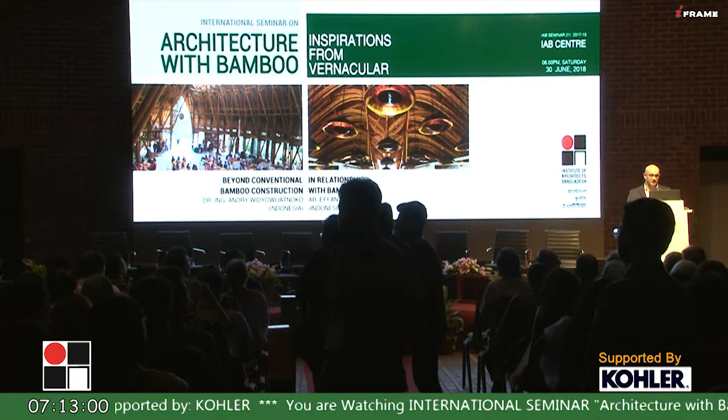Inspiration from vernacular architecture. For many regions, bamboo is a native plant and it is a sustainable material considering the energy consumption in its process of production. Bamboo can be treated as a sustainable, vernacular and aesthetical material in architecture. Hopefully today we will get wider information as well as inspiration from bamboo structure.

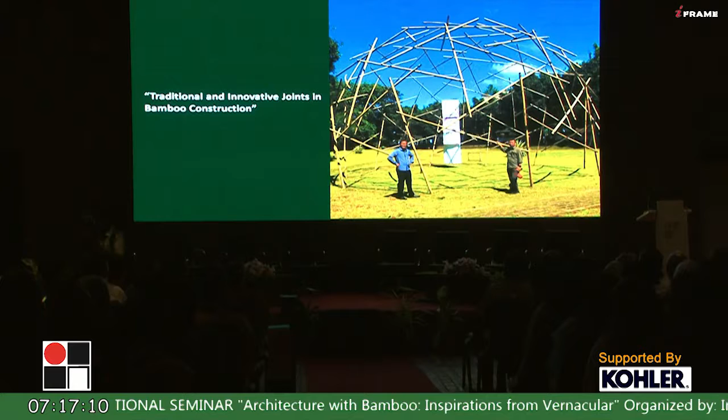Dr. Andry devoted himself to research on bamboo construction over the past several decades in Java and in general in Indonesia. Much traditional knowledge on how to build with bamboo has been lost while paving its way to modern architecture. After completing his graduation in 1995, he has been giving lectures and conducting workshops on bamboo construction in various countries like Malaysia, Philippines, Myanmar, Colombia, and Australia, besides teaching at ITB.

He has more than 25 publications and research works on bamboo and its different characteristics and construction techniques. As a pragmatic architect, he has completed more than 40 projects, including Great Hall OBI, a Bamboo Preservation Facility, and the Ecocenter of Koh Chang, Thailand. He even holds two patents on bamboo joints with radial compression for tensile, space truss, and knockdown structures, and a customized radial compression joint with multi-knots for high tensile strength connections.

Dr. Andry has won several awards. He was the award winner for Great Hall OBI as the Best Indonesian Building Construction in the Architecture category in 2011. Tempo magazine nominated him as the Bamboo Architect of the Year 2014. Today we are very happy he is with us to give a presentation on Beyond Conventional Bamboo Construction. Ladies and gentlemen, let's put our hands together welcoming Dr. Andry on stage. Enjoy the presentation.

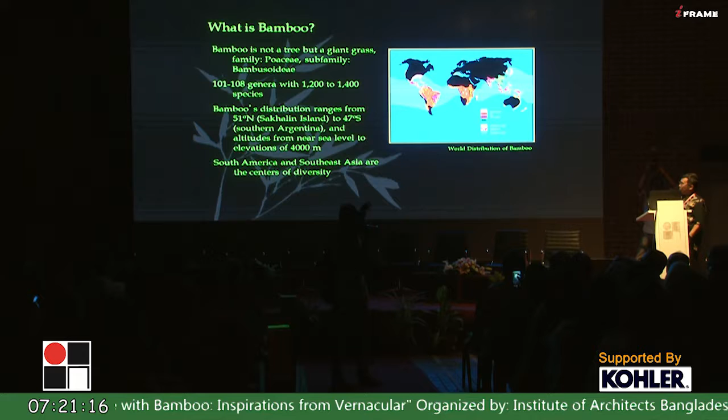Bamboo is actually not a tree. Bamboo is a giant grass, belonging to the family Poaceae or subfamily Bambusoideae. In the world, there are more than 1,000 species, and the distribution ranges almost all over the world. Most of the diversity of the species is in Southeast Asia and also in South America.

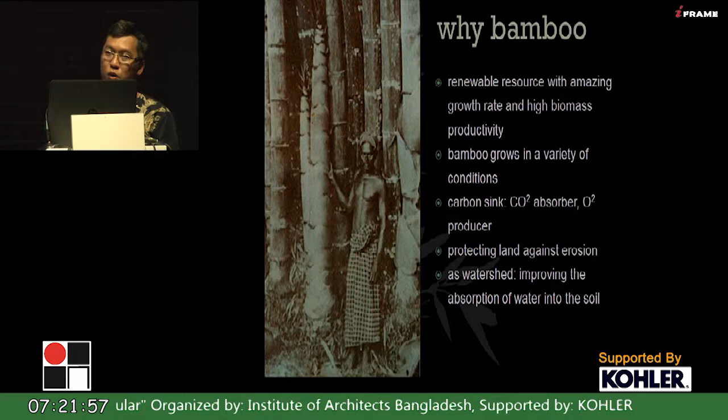I always tell the students why we have to work with bamboo, because when we use bamboo there are so many advantages. For example, bamboo is a very renewable resource with an amazing growth rate. It belongs to the fifth fastest growing species on Earth, and also produces very high productivity. Bamboo also grows in a variety of conditions.

The good thing about bamboo is it becomes a carbon sink and protects against erosion. It's also very good for watersheds because it improves the absorption of water into the soil.

When we talk about bamboo construction, you can see here there are so many varieties of bamboo construction. As you can see here, all of this I consider as bamboo construction.

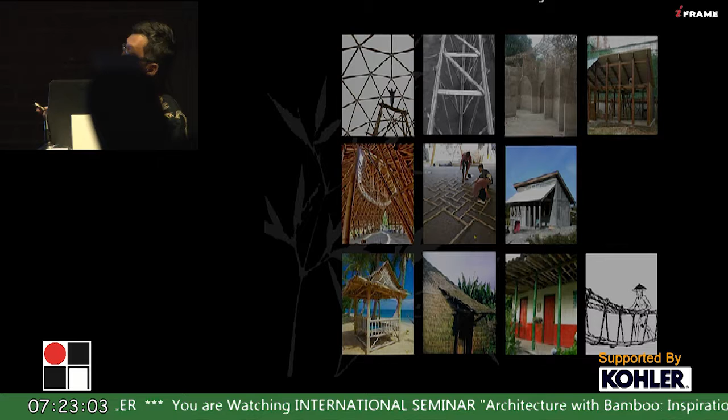But instead, if you take a look, it looks like concrete construction. It looks like timber construction, but actually this also belongs to bamboo construction.

That's why I made a kind of classification in bamboo construction, and the best way to classify it is by the form of the poles that is used. For example, this belongs to bamboo poles construction, and this belongs to split bamboo construction.

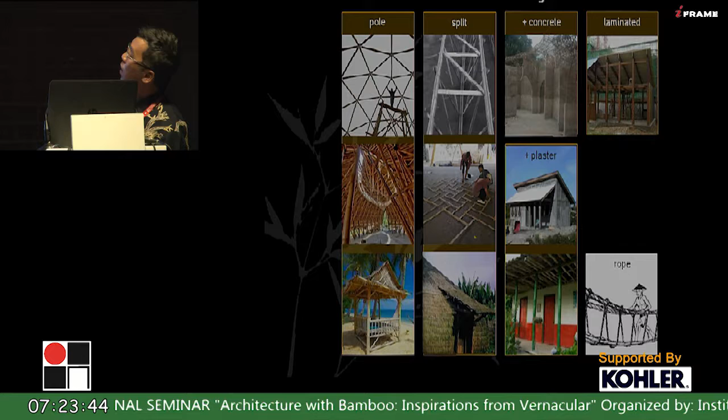But further than that, in the upper part, as you can see here, bamboo is used to replace other materials. The best example is this one: laminated bamboo, which can replace 100% of timber construction.

That's why in my classification I classified the upper part as substitutive bamboo construction, where the idea is to substitute other materials with bamboo, which is more sustainable.

Other than this substitutive bamboo construction, I would call it conventional bamboo construction. I divided this conventional category into traditional bamboo construction in the bottom part and engineered bamboo construction in the middle part.

And this is the construction that I have already done, belonging to the group of substitutive and also conventional bamboo construction that I've already researched up to now.

First, I would like to give some overview about the possibility of using bamboo as a replacement for brick construction. This is a development of plastered bamboo construction.

Why did I do this? This was in the early days when I went into bamboo construction, because almost no one in Indonesia wants to live in a bamboo house anymore. That's why I tried to provide the common image of a permanent house instead of masonry construction.

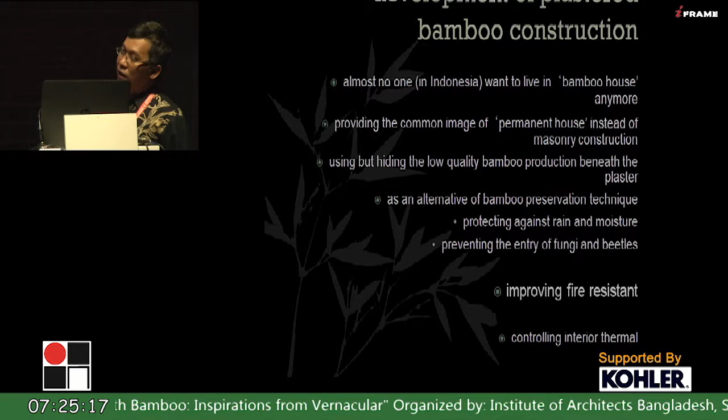The main idea was also to improve fire resistance. By doing this, I already made a fire test

to the system. The idea is to make a woven bamboo here, and then we have a half bamboo acting as a column here and also as a beam. Everything will be plastered on the outside.

So it looks like brick construction. I've made many prototypes of this building. We can build this one in the workshop and then bring it to the location we want.

We can build this bamboo structure in only one day. After that, we can plaster it so it looks like brick construction, but it's made out of bamboo

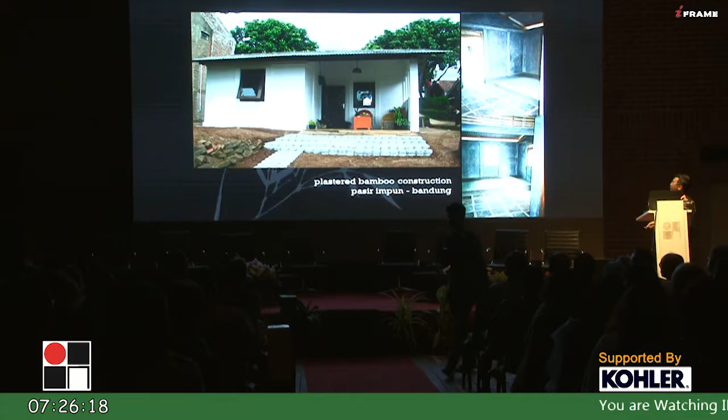on the inside. I also made other possibilities using different types of woven bamboo, like this one and this one. And these are other examples of this structure.

This is the research that I've done recently, testing the bamboo plastered wall, and it can pass 2 hours of fire test using the plastered bamboo construction.

I think this is also one of the options to provide the common image of brick construction, but using low quality bamboo. If we go back to the classification, I would like to discuss

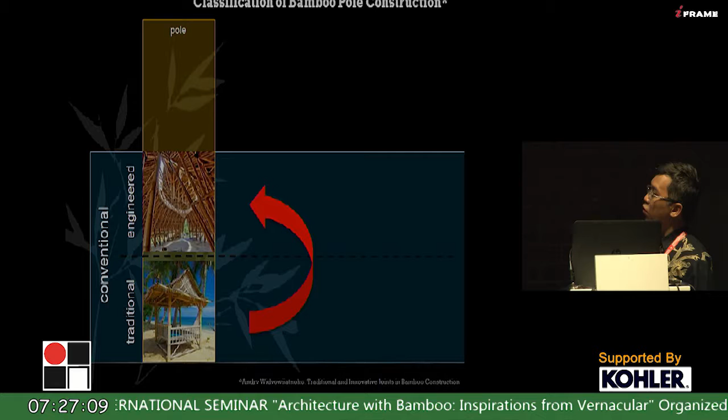the development from traditional bamboo construction into engineered bamboo construction, as you can see here. Basically, going from traditional to what I would call engineered bamboo construction means getting bigger and wider spans—making it bigger, making it wider span, even making it higher. This is the main idea of the development from traditional into engineered bamboo construction.

How to do this is by strengthening the structural element.

In traditional bamboo construction like this one, we use only one post here, and then only small pieces of a post here. It's strengthened using, for example, in here, 12 or 9 poles of bamboo column.

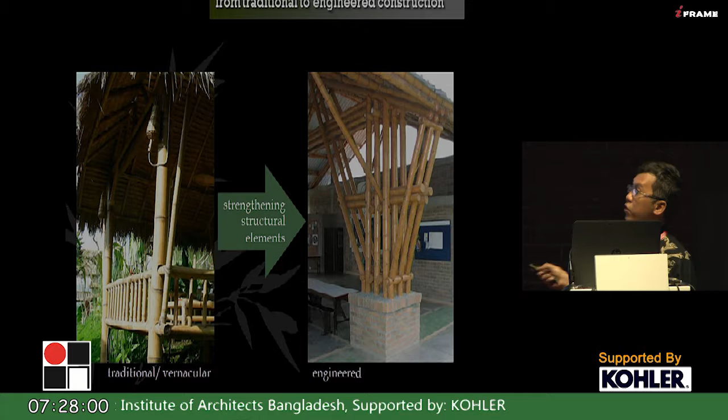If we consider adding this one, it's 15 bamboo columns, just strengthening the structural elements. How to do this? Actually, there are only small steps.

In traditional bamboo construction, mostly we use a connection like this, using a dowel here, which prevents sliding, and to prevent popping up we use a rope connection. But this connection is limited to only 2 layers like this. It's impossible to connect more than that.

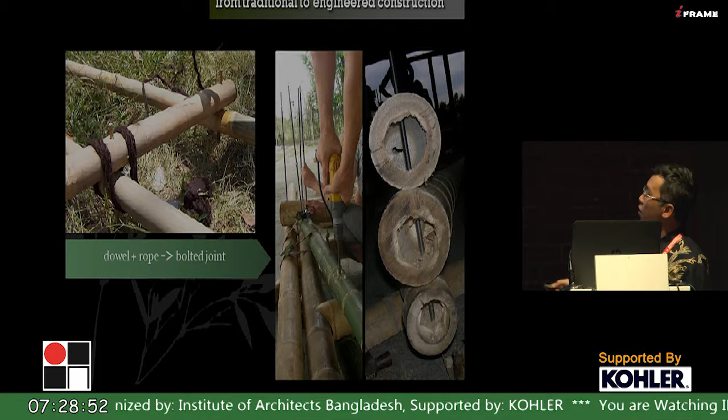It's not effective, so the development moved from dowel and rope into a bolted joint using a long threaded rod like this, utilizing an electrical drill. With this we can connect even 3 bamboos or more, much easier and much stronger than before.

This is one of the results, when I designed this Great Hall of Outward Bound Indonesia in Jatiluhur, only 2 hours from the capital city of Indonesia. This is the design of the structure, with dimensions approximately 31 meters by 20 meters, without any column in the middle. I used more than 8,000 bamboos for this structure.

This is the upper part. I used a hypar structure at the entrance, and on top of the stage there. And this is the floating roof that I designed.

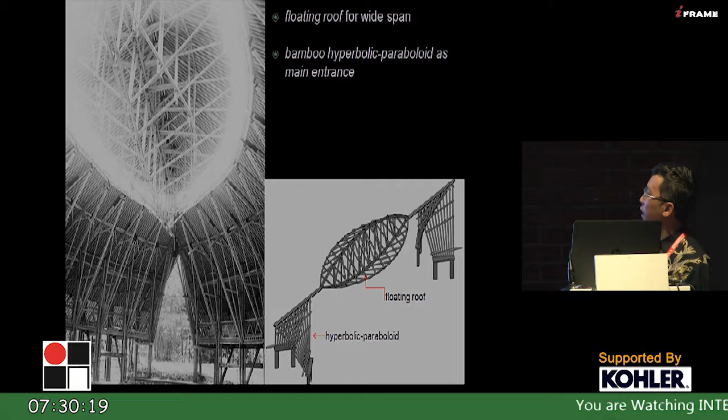I introduced the use of bamboo as a tension element in this part. I also introduced the use of a hyperbolic paraboloid to create the entrance at both ends. And this is the floating roof.

The span of 20 meters was made by having 5 meters of cantilevers and 10 meters of floating roof in the middle. I used only 30 two-dimensional frames like this, then arranged them radially to become more 3D spaces.

And this is the main entrance. As you can see here, this is the condition of the building during a bamboo symposium. This is another program in this building.

The good thing about the structure is the pattern of the skylight above. It's really beautiful in the bottom part.

The other project I want to present is just recent, not yet finished, but almost complete, which is Teras Sunda Cibiru. It's like a cultural building in Bandung. I made a lot of facilities, but I want to present only the hall, the big hall.

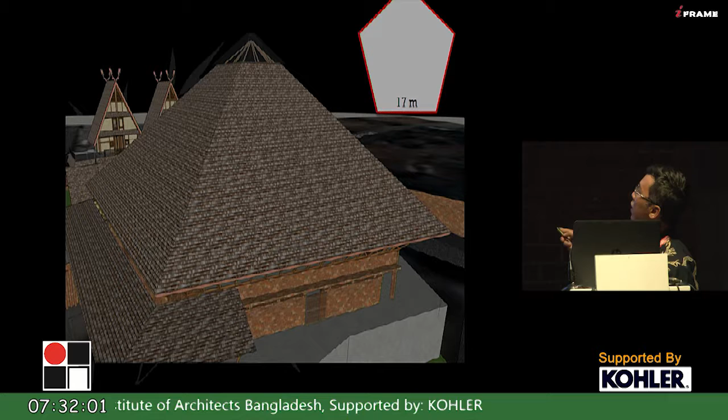Actually, the big hall is like a pentagon, with a span of 17 meters from here to here, and without any column in the middle. I solved this wide span structure problem by using a twisting structure.

I solved it with twisting and then stacking until the top. This is the design that I made, like this. And this is the interior part of the structure. And this is the result.

It's not finished yet, it's under construction. Actually, it already stands on its own, but the scaffolding hasn't been removed yet. Some parts are already removed, as you can see here. This is the main structure of the roof.

And this is the structure. I used a steel pipe in the bottom part because I needed something really reliable to transfer all the force into the column below.

If we go back to the classification, now I'd like to discuss the development from engineered bamboo construction into substitutive bamboo construction. Conventional bamboo construction is based on the characteristics of the bamboo. But in substitutive bamboo construction, it basically just tries to copy other construction, other structures, replacing the material with bamboo. That's why the characteristic of the structure in substitutive bamboo construction is quite similar to the characteristic of

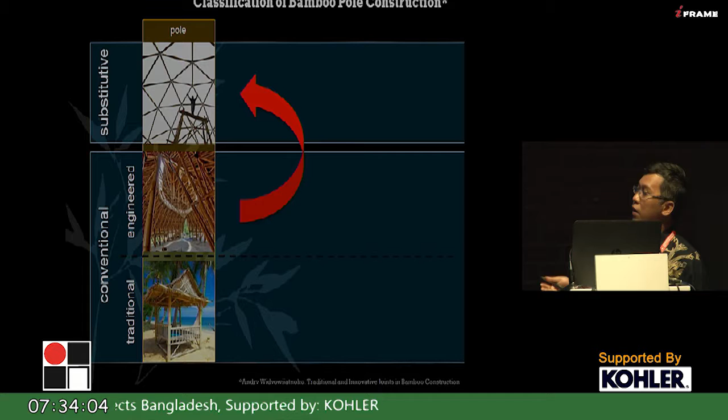the one that is replaced by bamboo. The main idea of substitutive bamboo construction using bamboo poles is to replace established space structures that are already made mostly from metal, like this, or sometimes also from timber.

Then the idea came up - this is from the book The Gift of the Gods by Oscar Hidalgo - and the idea came up of how to replace this material with bamboo, like this one.

Some of this experience has already been done, and this is some of the examples. The characteristic of the structure is mostly three-dimensional frame, whereas in conventional or traditional bamboo construction it's mostly only two-dimensional frame.

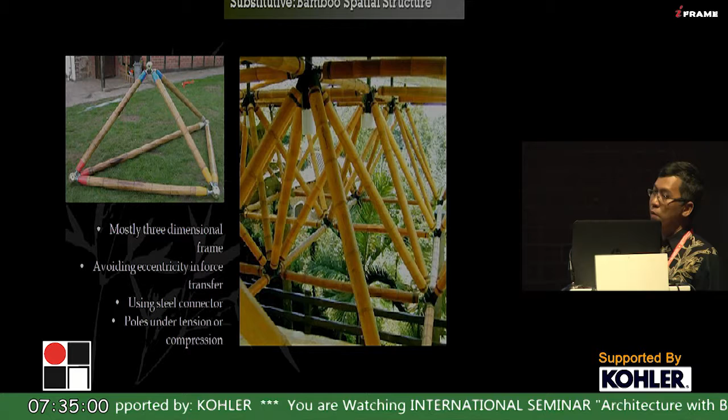It also avoids eccentricity in force transfer, whereas in conventional bamboo construction there are often many eccentricities in force transfer due to the difficulty of connecting all the bamboo together at one point. It also uses steel connections and introduces bamboo poles under tension, whereas in conventional construction it's mostly under bending or under compression.

The challenge came because we want to have a bamboo connection which avoids eccentricity in force transfer, because this is the main idea.

The other aim of the research is making the bamboo purely under tension or compression. It took a lot of effort to try to find the best and most effective bamboo connection.

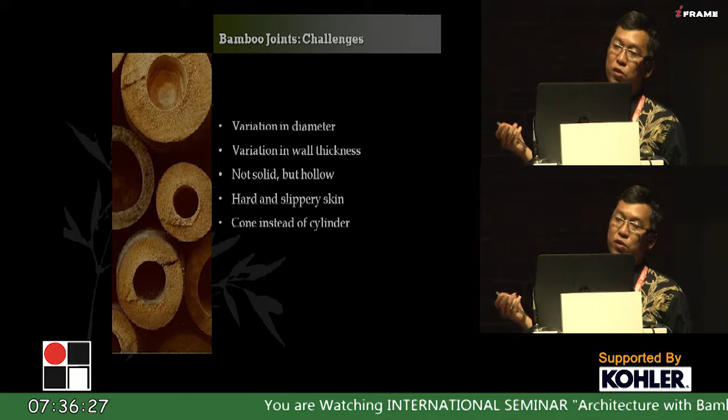There are so many challenges in doing that. I want to mention only 5 of them. Bamboo has variation in diameter, not only because one species of bamboo has a different diameter from other species, but also variation between the bottom part and the upper part, for example.

There's also variation in wall thickness. As you can see here, some bamboo have very thick walls, some very thin walls. Bamboo is also not solid but hollow, and it has a very hard and slippery skin. Bamboo is also considered as a cone instead of a cylinder.

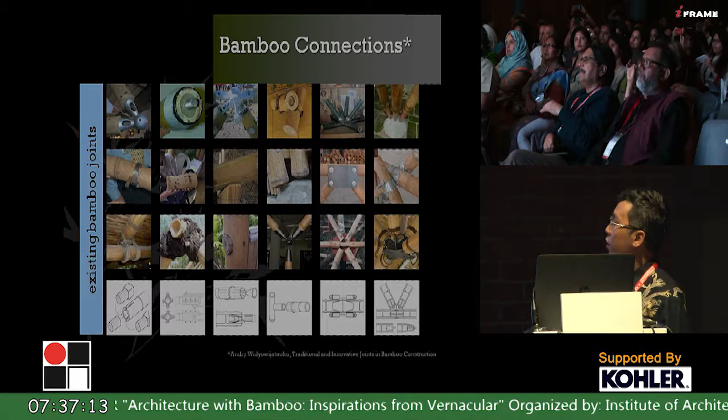In the existing world of bamboo construction, there has been so much research and experimental construction trying to make bamboo joints. Some are already applied in construction, some only at laboratory scale, and some only as ideas in drawings. Although there are so many bamboo joints existing in the world now...

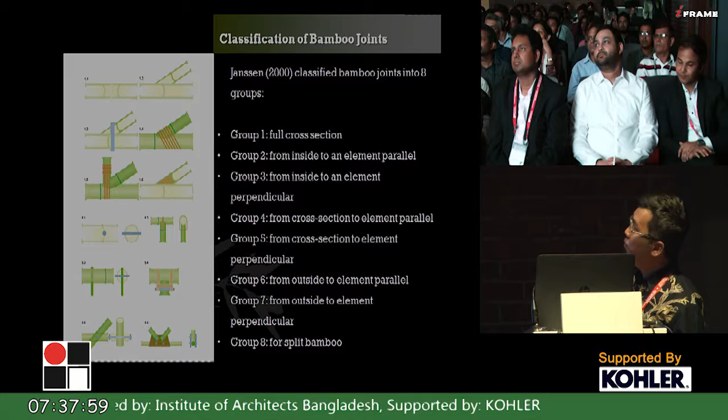before 2012, there was only one classification, by Professor Jules Janssen in 2000. Professor Jules Janssen is a professor from Technische Universiteit Eindhoven in the Netherlands, and he classified bamboo joints into 8 groups.

The problem with this classification is that group 8, for split bamboo, is not relevant to bamboo pole construction. Also, according to the author, groups 3 and 7 have hardly any practical application. Though they are theoretically important, they are almost impossible to make in the real world.

That's why I tried to make a new classification of bamboo joints in 2012. My classification is based on the following criteria: the way of force transfer and the position of the connector, whether it is attached on the inside or outside of the pole, and whether it is attached parallel or perpendicular to the fiber. A type of joint is considered as a connection between one bamboo and its connector or supporting base. This is different from the classification made by Professor Janssen.

Professor Janssen, for example, made this picture as one type of classification, one group. But in my classification, I divided it into 2 groups: this is group 5 and this is group 1. Here is the classification of bamboo joints.

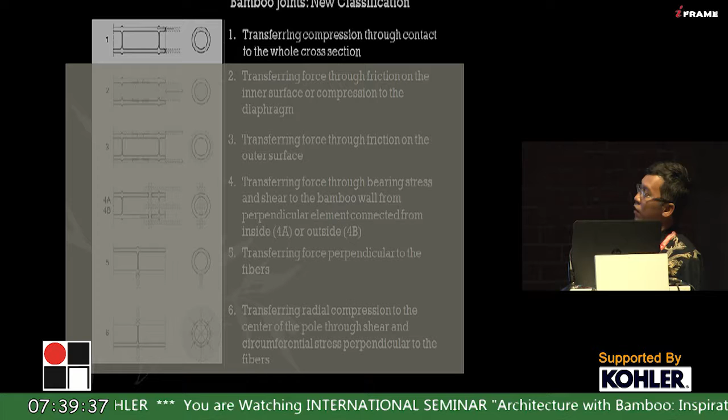Group 1 transfers compression through contact to the whole cross-section—only contact to the whole cross-section is taken into consideration. The second group transfers force through friction in the inner part of the bamboo, or compression to the diaphragm, since bamboo has a diaphragm inside. Group 3 transfers force through friction on the outer part.

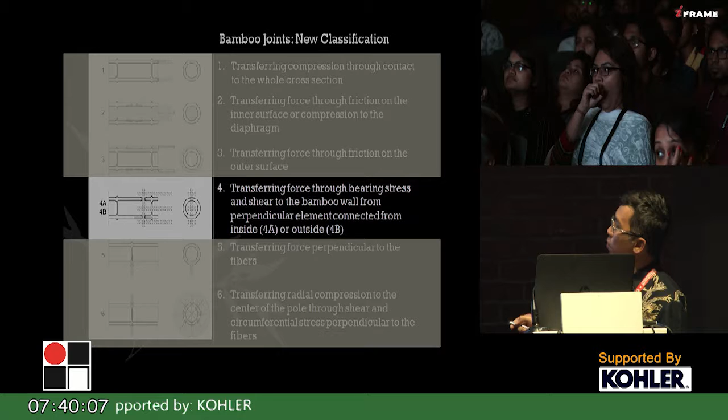Group 4 transfers force through bearing stress and shear stress to the bamboo wall, perpendicular to the fiber, connected from inside or from outside. Group 5 transfers force perpendicular to the fiber, and group 6 transfers radial compression to the center of the pole through shear and circumferential stress perpendicular to the fibers.

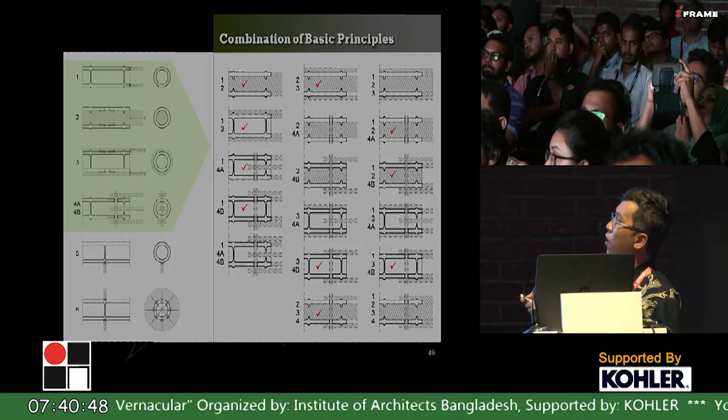I added this joint because most of my research basically uses these kinds of principles, which I will present later. Most bamboo joints use a combination of principles, like combining group 1 and 2, or groups 2, 3, and 4. With a tick mark, I indicate that I can already find it in reality; this one has not yet been found in reality.

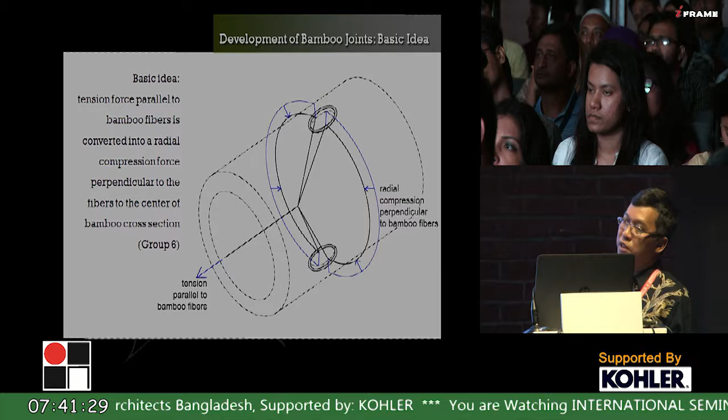Now I would like to go into the development of bamboo joint, which I already made in 2012. The main idea is very simple: the tension induced parallel to the fiber is converted into radial compression on the outer part. So the stronger the tension, the stronger the radial compression will squeeze the bamboo and generate more friction on the outside. It's considered a very effective bamboo joint, and I made many research and calculations on this type of joint.

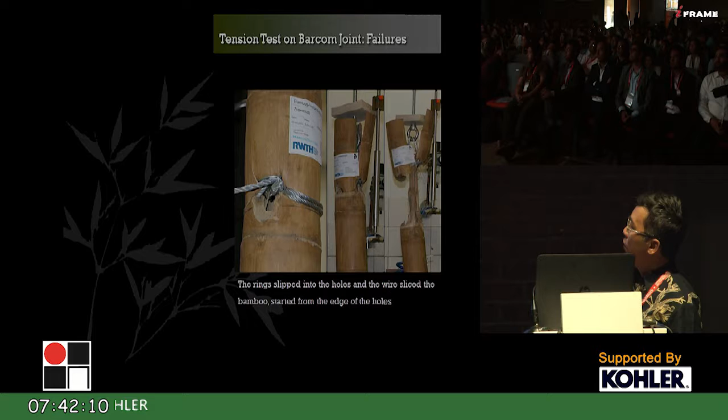I made 3 samples of this using the Guadua angustifolia from Colombia. This is the detail of the joint, approximate detail of the joint, and this is the failure mode. The steel wire tears down the bamboo and then goes up like this. But the strength is very high.

The average ultimate load capacity is 3.5 tons. It's already very good. However, I tried to improve the strength of the joint. That's why I went to the next bamboo joint.

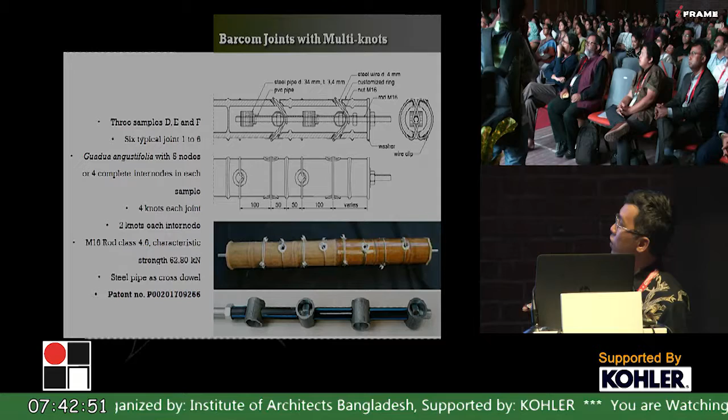Barcom joint is the bamboo radial compression joint with multi-knots. Instead of only using one knot here, I multiply it into 4 times, with the detail shown here. For this one, I use a 16 millimeter threaded rod with characteristic strength of more than 6 tons. And this is the test that I've made.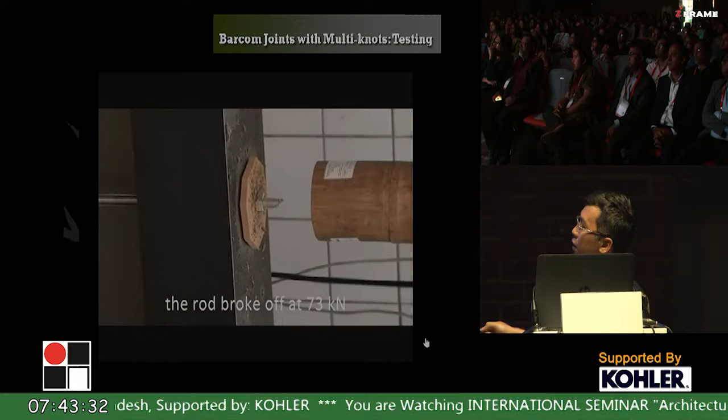6 tons, 7 tons, 7.3 tons, and its failure is here, in the 16 millimeter threaded rod. 28, 50, 60, 6 tons, 70, 75.

The failure is the same in all of them, in the threaded rod like this one, with only small scratches on the bamboo. This means the capacity of the connection can be much higher if we change the properties of this threaded rod. So it's a very effective joint, and as you can see, the average load capacity is up to 7 tons.

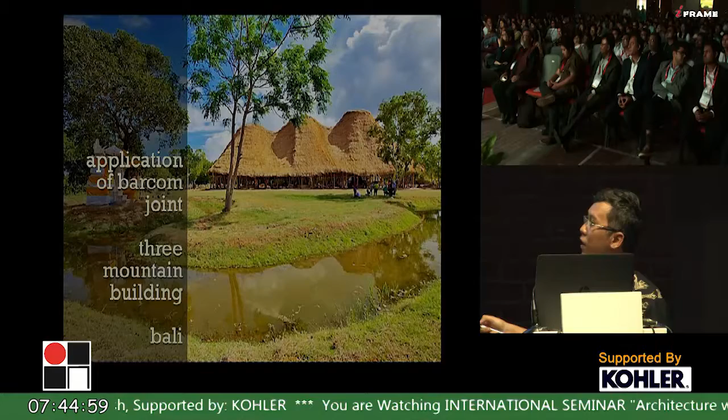The application of this structure is already implemented in the 3 Mountain building in Bali. This is the 3 Mountain building. Previously, it was not used because of a lot of deformation when the wind blows.

This is the structure. Basically, there are 3 big columns and also a perimeter column. The very long rafter lies from here to here, and because it's very long, it does not work in bending but works in tension in this part. So it's up to 15 meters long, these rafters.

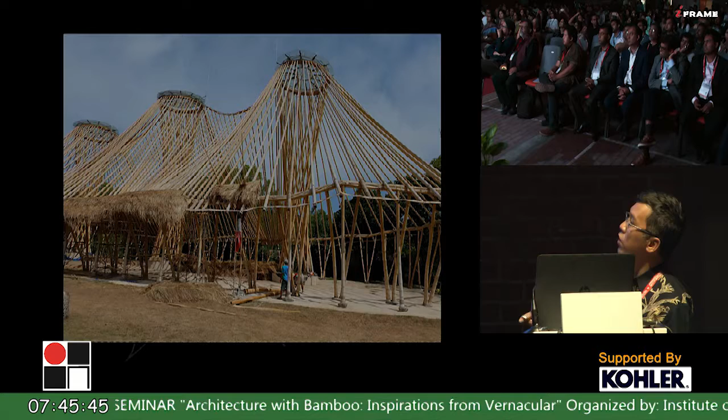This is the detail of the joint using the Barcom joint here, and this is the joint that I've designed, connecting all of this on top of the structure, as you can see here. This is the bamboo radial compression joint, and this is the very beautiful structure.

It was designed previously in Green School, and now it moves to Pulau Serangan. I think it was designed by Jörg Stamm, one of the bamboo experts in the world. This is the construction.

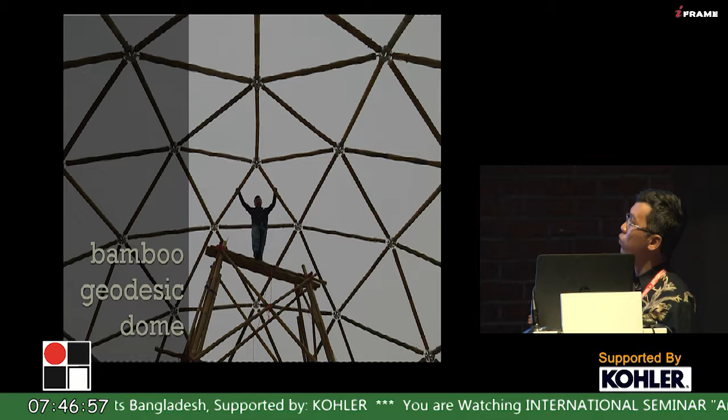Another project that I want to show you is the bamboo geodesic dome. Basically, we tried to copy another dome and just replace it with bamboo. I've built this one in only 2 days. The preparation took almost 2 weeks to make all of this connection, and then we erected and assembled this in only 2 days in Damyang, Korea.

It was used to sell souvenirs during the World Bamboo Congress in 2015.

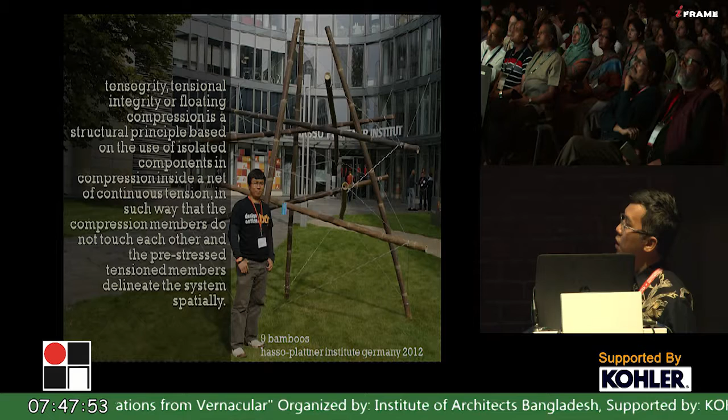Another project that I want to show you is the bamboo tensegrity. I would like to introduce bamboo for use in some other structure, beyond conventionality. That's why during my dissertation I also built this tensegrity structure. What is tensegrity? Tensegrity, or tensional integrity, or floating compression, is a structural principle based on the use of isolated components in compression, always made with bamboo, inside a net of continuous tension.

This continuous tension is made of steel wire in such a way that the compression members do not touch each other, and the pre-stressed tension members delineate the system spatially. So it's like a floating bamboo here. I built this one in 4 hours. My previous structure was built in 1 semester with students. Now I built this only in 4 hours with only 3 volunteers.

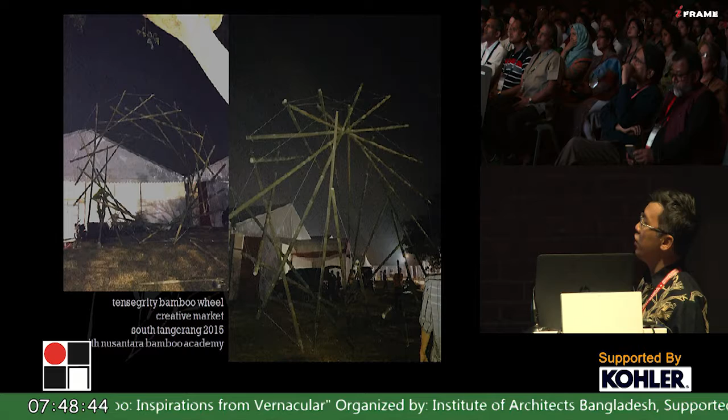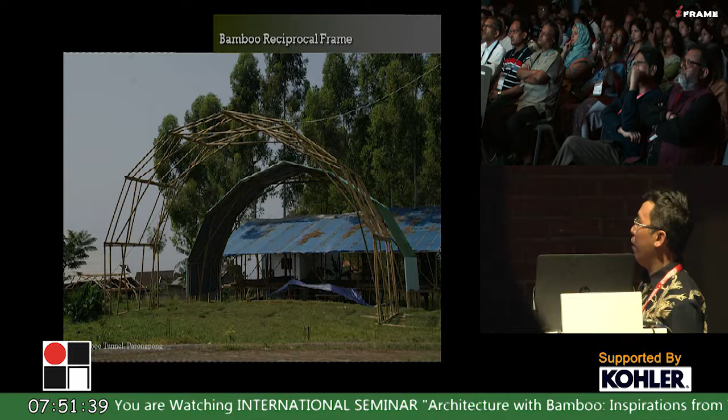After a lot of experience conducting tensegrity workshops and research in tensegrity and reciprocal frame, I then invented a new system of structure, which is the combination between these two.

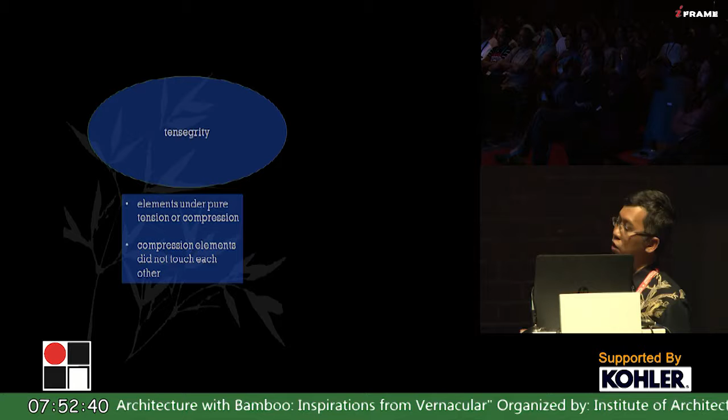First, I would like to give you the main characteristic of tensegrity: the element is under pure tension or compression. If I make it with bamboo, the bamboo has the compression, and the steel wire will have the tension force. The main idea of tensegrity is that the compression elements do not touch each other. This is the characteristic of tensegrity.

On the other hand, in the reciprocal frame, in the conventional way, the element is under bending stress - not compression, not tension, but bending stress. One element lays on top of another element reciprocally. So with small pieces of timber, we can have much more span.

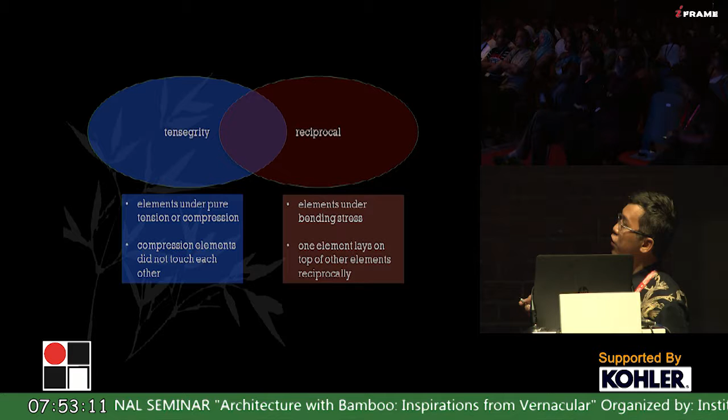Then I combine these two to have the rection - I call it rection, or reciprocal tension. It is different between these two, because the element that I use is under tension or bending stress. This is different from tensegrity, which is under tension or compression, and different from reciprocal frame, which is under bending stress. Rection is under tension or bending stress.

The steel wire will have the tension, the bamboo that I use will have the bending stress. But the bending elements did not touch each other like in tensegrity. This is different from the conventional reciprocal frame, where one element lays on top of another element reciprocally.

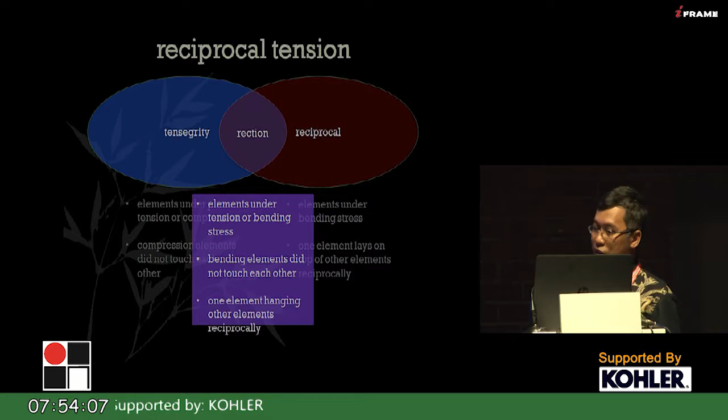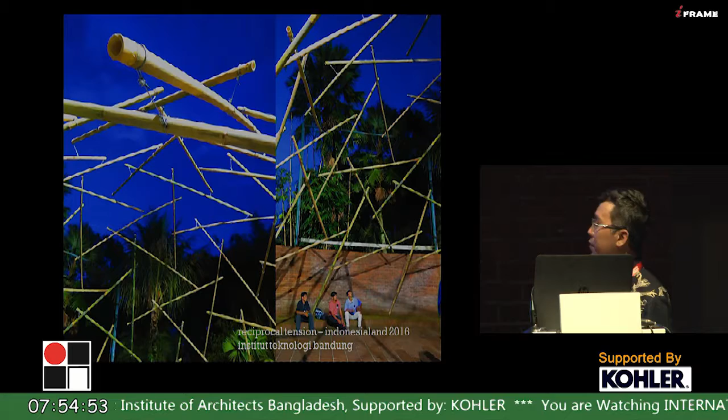This is the latest workshop on advanced bamboo tensegrity structure in 2017 that I want to present. I would like to show you, as the last part of this presentation...

This is actually a collaboration workshop between Erfurt University in Germany, Kyushu University from Japan, and Institut Teknologi Bandung, my university in Indonesia.

The workshop was called Advanced Tensegrity Structure. The participants were separated into groups, and in 2 days, starting from knowing nothing about tensegrity, they had to design a tensegrity sculpture with an amorphous shape.

Then on the third day, for 3 days, we built the real tensegrity sculpture, and we also built the rection dome, which is the biggest one that I've ever built.

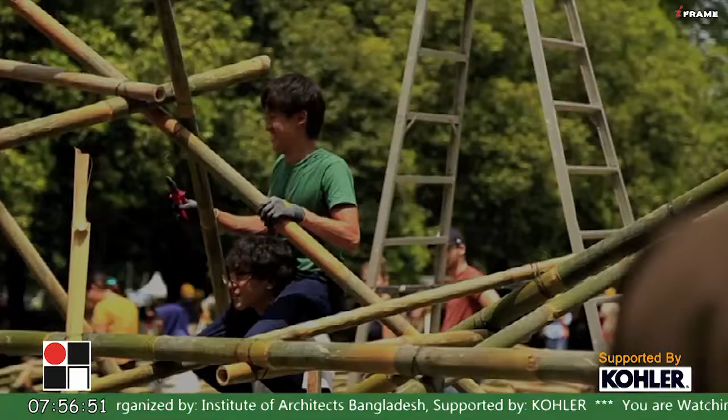This is the construction of the amorphous tensegrity, and this is the construction of the reciprocal tension, or rection dome.

This is the amorphous tensegrity.

I will show you this - this is the reciprocal tension, and how it is very stable, although I shake this one. It's very stable; I shake it, but it's very, very still, very, very stable.

I did this just before I had to remove this structure, to show that it's really, really stable, although it looks like it's shaking.

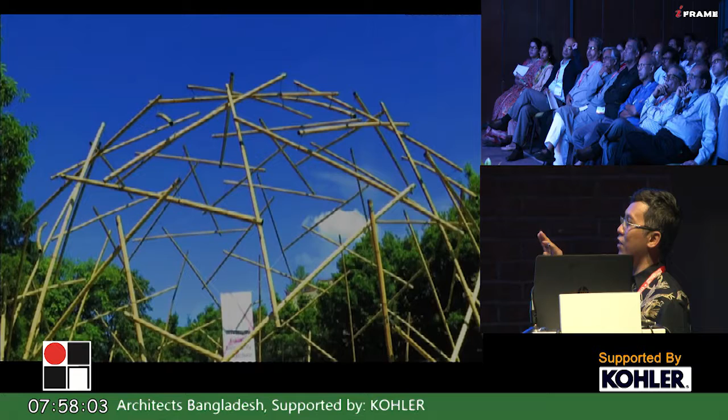I think that's all for my presentation. Thank you very much.

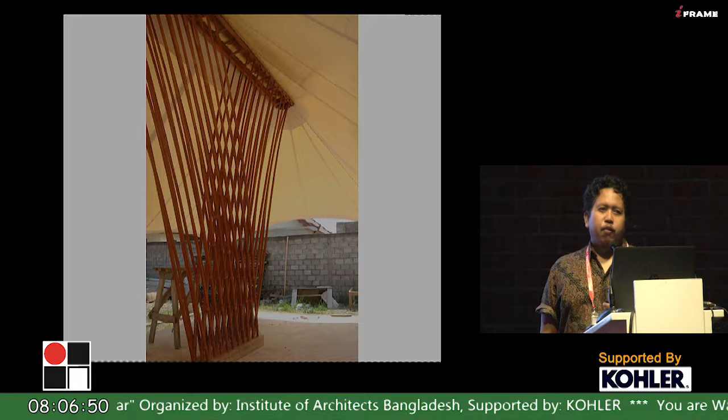And this is from 2007. Now it's about 11 years, right? And it still exists. So it's kind of strong too and durable, actually. When you protect the bamboo from the elements, from the rain, from the sun, it's strong enough and it's long lasting - at least more than 10 years now.

So with this project, I got the idea, okay, I fell in love with this material. This gave me an answer, because I wanted to design something playful, but in the meantime that's really expensive using steel, using laminated wood. But God gave me this material - it's everywhere in Indonesia, and I hope there's also in Bangladesh. If you put the energy, put the creativity in there, it becomes something that works and is also affordable. So this is my first case that made me fall in love with bamboo.

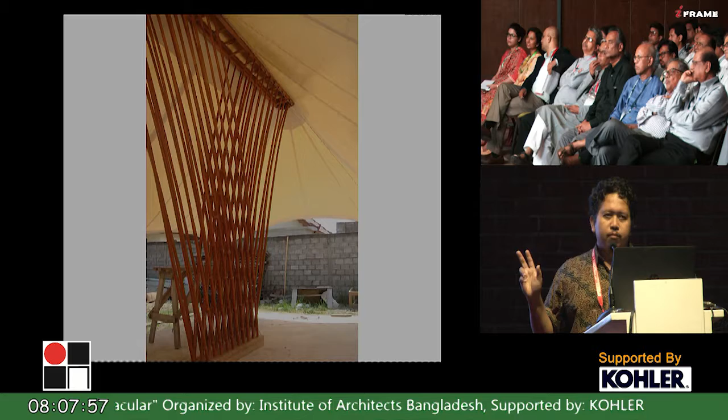So by doing that, I resigned from that company, and then I started learning about bamboo. And these are a few characteristics of bamboo that I found based on my experience.

Bamboo is long. Actually, if you go to the forest, bamboo is at least 14 meters long. But if you see bamboo in the street, it's 3-4 meters, because of the truck that brings it here - it's really difficult to bring 14 meters. And anyway, people don't need that much.

But actually, it's long, and bamboo is curved, so it's not a cylinder. As Andrew said, it's conical, but it's also curved. When you draw bamboo, you cannot draw it straight - bamboo is always curved. That's the natural characteristic of bamboo. I need to treat it as a curved material, not as a straight cylindrical pipe material. And it's hollow, which makes it lightweight, and it's flexible, smooth, elastic, and has a lot of other technical properties that Andre already covered in his presentation, which is good.

And we, F Studio - I established my own studio - are committed to creating characteristic designs using bamboo, but it should be something that can only be built with bamboo. I mean, not trying to replace other materials' style, but designs that can only be built with bamboo, or at least effectively built with bamboo. Maybe it can be built with steel or other materials, but then this design is only effective, cost-wise and in the way it works, with bamboo. So that's how my studio really wants to go about designing with bamboo.

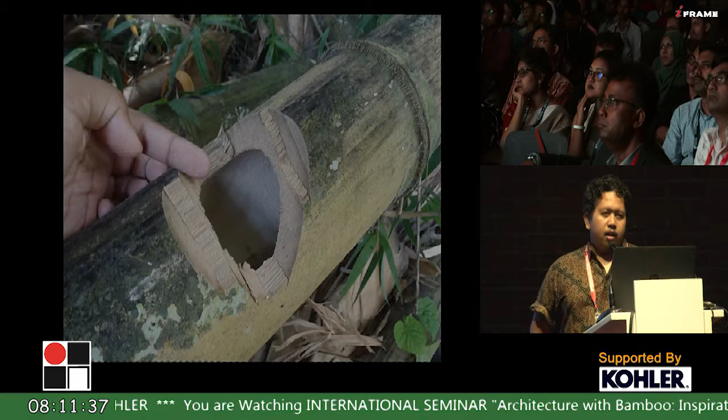Again, we try to use local materials, so we go around checking the bamboo, because they never used it before. I found their bamboo - it's not as big as what we have in Bali, but the thickness is really good, that's my hand showing the thickness. Because they never use it, this is really old bamboo, really strong, comparable with the strength of wood.

So it's really good. And the good thing with this client is, just do whatever you want, Evan, as long as our activity is accommodated. That's really a dream client, right?

Because in that area, they never used bamboo as a building material before, they just use a really basic shack or basic hut. We try to show them what kind of bamboo structures can be done.

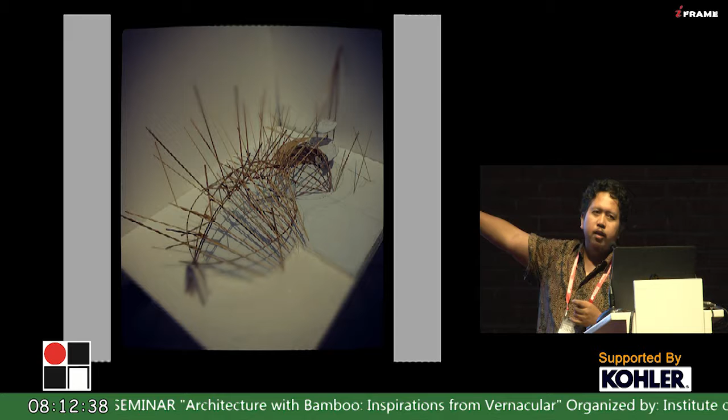This is the preliminary model. We give them a 15 meter span in the front as a bamboo hall, 15 meters, no columns, big span. In the center, we introduce them to the bamboo shell that will accommodate the library for the kids, and we also give them a 3-story design to show that bamboo can actually be 3 stories.

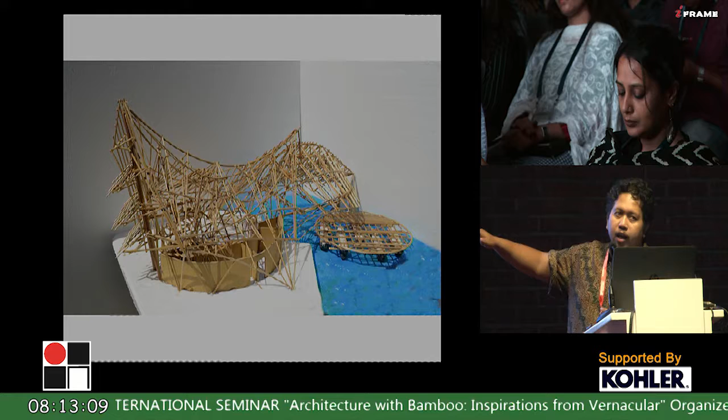So this is the actual structural design that we designed. We put extra land a little bit, to make sure that the library doesn't drown at high tide. But the floor of the hall uses their boats, their natural wooden boats, so they can float and go up and down, while the structure hangs around 15 meters over the lake.

It's a funny thing - when we brought the models there, the kids said you're bringing toys. It's not a toy, this will be the actual building that you'll have.

The challenge was that all the carpenters said, what kind of building is this? It's difficult to make. So let's make it together - I brought a few experts from Bali and invited all the carpenters who wanted to learn to work together with us.

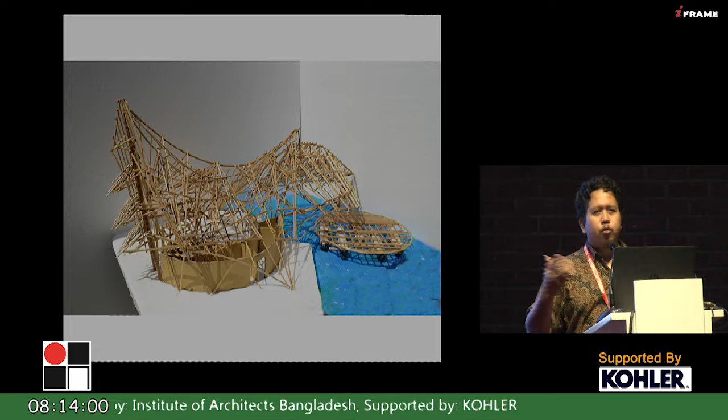So this is how the construction happened, during low tide for sure. We have the retaining wall, we have the foundations in the middle of the lake, and then we start to join the bamboo. That's how the work went.

And so this is when they're done, this is during high tide again. For sure it's not as clean and perfect looking as what we have in Bali, but it was built by only 4 Balinese workers, with 40 carpenters coming and going doing that kind of structure. It's still amazing for us.

And this is the structure also during high tide. This is the 3-story office for the NGO.

We try to also use local roofing, which they said isn't cool anymore, but when we designed something like this, they started to believe that this grass roof is actually great - if you know how to use it and if you're creative enough to tweak the design of it.

And this is the library. We put a skylight in there to make sure sunlight comes in, and this is the Bodhi tree, the Buddhist tree. Somehow it's there - we weren't planning to plant it, but it came up on the side. So it's blessed, the tree of knowledge in the middle of the library. It's really perfect, and it grows because of the skylight - they get sunlight and always water it, so it's growing.

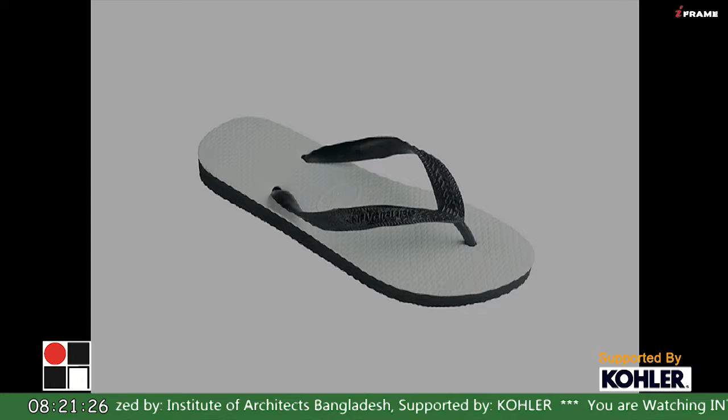But then, actually, I wanted to go to bed, and I checked my sandal - this kind of structure, right? You know, columns with two arches around, and if we think of the columns with a round table bar and people eating there, with no columns, a series of columns, so no view will be blocked by the columns, full view with this kind of structure.

So the mind is still developing. I start making sketches, so I'm not going to bed - this is the idea. Sorry, my bad sketch, but this is the idea. So there's the flip-flops as the main structure, with the dining hall there, and the bar in that pointed column area.

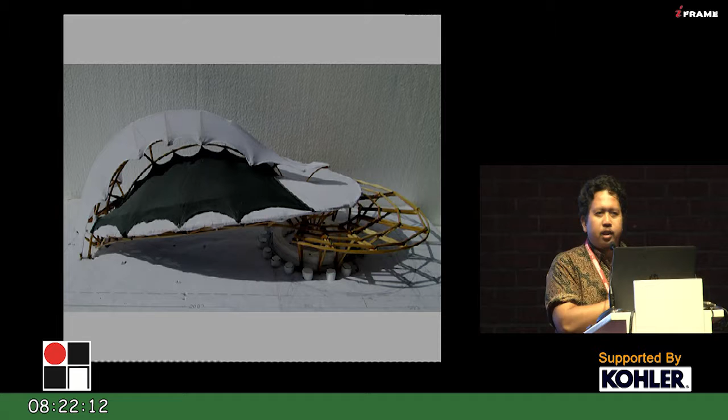We make the model again like that with the space frame, but organic space frames - this is from the front. Then we put a tent compared to the others, using natural materials, because we try to be different while also having lightweight tent structures. This is the model of the bar from the other side, and we did the structures. And the client chose blue instead of white - okay, that's the client's choice.

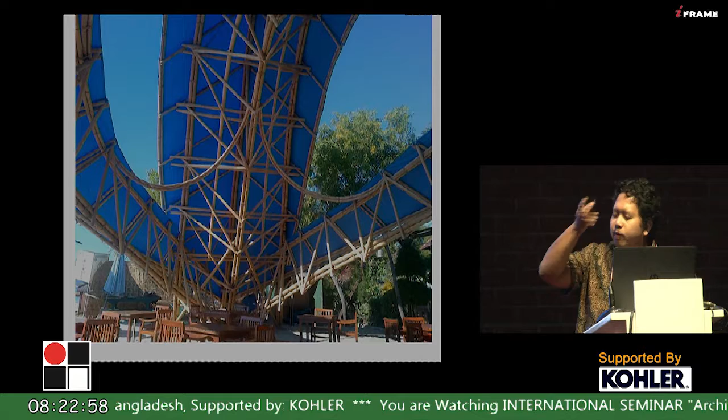Actually, I'm not really into the blue one, but the clients wanted blue. It's striking from farther away on the islands - that's the new bamboo building. The challenge is these structures, like the tent, capture the wind. We worried when wind blows from the ocean it could blow this up, since it's lightweight. So we needed to think smart about that.

So what we designed was modifying the middle tent with layers of sails, inspired by boat sails. This gives a nice feeling from underneath, but also lets the wind flow through, so the building stays safe.

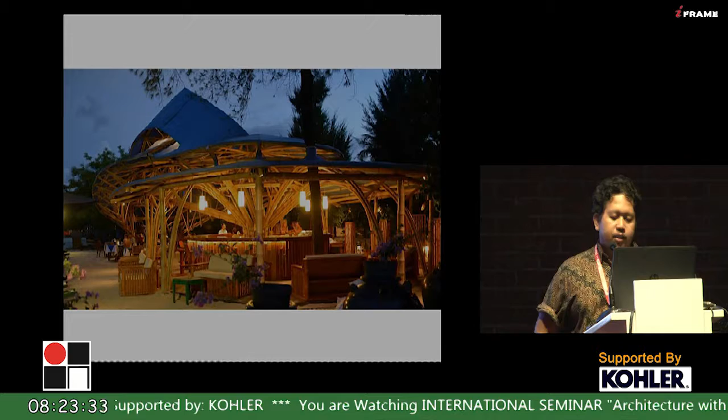So this is when it's done. This is the bar, from the other side, and this is from the ocean. When people eat there, they're not bothered by any columns, so a lot of people come to this beach bar because of that - they get more than 180 degree views.

And luckily, after that, there was an exhibition of Indonesian architecture in Frankfurt, Germany, and because that building is very unique, we were chosen as one of the 15 architects in Indonesia to exhibit in Frankfurt.

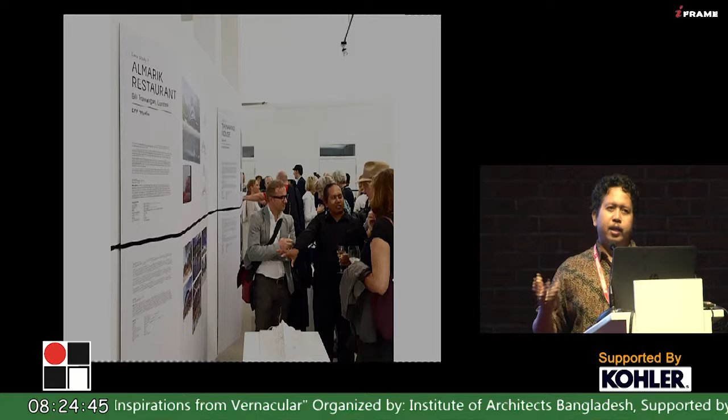And so we became one of the 15 architects in Indonesia chosen because of the ideas - it's a good word for it. There are many famous architects in Indonesia on that list, but none building with bamboo. Only me, working in bamboo.

Okay, that's about the flip-flop buildings. The other goal is about solid and strong - you need to make something solid and strong while facing what's in front. We made a wedding chapel in Candidasa, East Bali. There are a lot of wedding chapels in Bali, but again, they wanted something unique, different from other wedding chapels. The challenge was the space given to us was really tiny - only 8 meters wide and 15 meters long, in the middle between palm trees.

But we needed to think creatively using bamboo. The chapel is mostly triangular, and triangular is a really solid structure. But it's not a basic triangular shape - we followed the curve of the bamboo when making the triangular form, connecting them like this. With a tie beam underneath, that makes a perfect, strong triangular structure.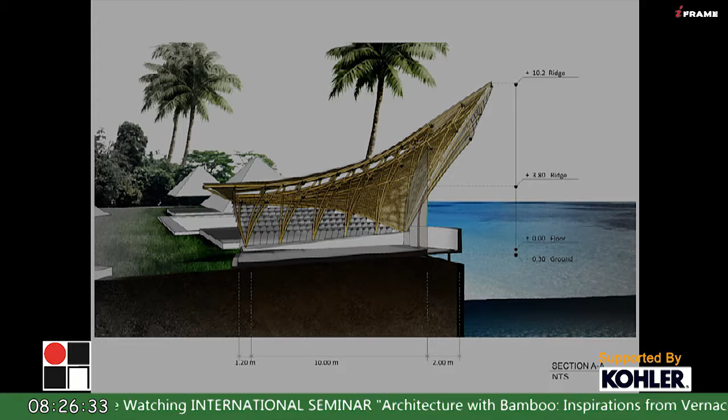The design faces the ocean. The good thing with bamboo is that it's considered semi-permanent, so we can build right to the edge of the retaining wall, which other building materials cannot do.

Because there are spectators - waiting people, family and so on - my client said we need to see each other from each side, not just within the triangular shape. So we made a series of glass panels with gaps between them, to make sure that when wind blows from the sea, it spreads out rather than creating a wind tunnel that makes everybody sick.

The structure itself is really simple and fast - just grab whatever bamboo we have and make triangular shapes. We tried some creativity here too - rafters are usually vertical, but we tried making them horizontal instead, again following the shape of the bamboo.

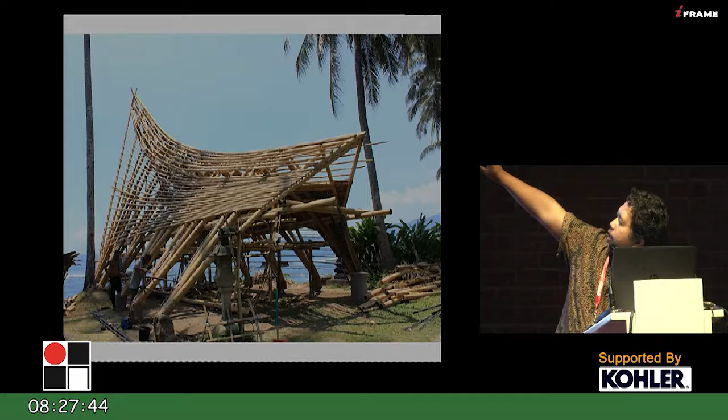We used small bamboo that people never used before - the kind people usually just throw away. We used it because the distance between rafters could vary, no need to be exactly the same. So it's tight in some places and spreads out in others - this works really well for the interior.

So this happened, and this is the glass - we made custom glass. The glassman was really mad at me because it was difficult to install.

When it's done, like this, we use the flattened bamboo roof. And this is from the oceans. So the glass really looks nice, composition-wise with the bamboo. And we not only did the retaining wall, we offer the retaining wall there too. It's okay because these are semi-permanent buildings.

This is the interior when we don't have any furniture yet, with a simple colored bamboo with the lights, and then this is at night. So at night, if there's no wedding, it becomes the lounge of the hotel. Simple, triangular, but strong.

And again, the other thing is compromise. If you do a good thing on the small project, maybe you will get the bigger one. So that's what happened with us.

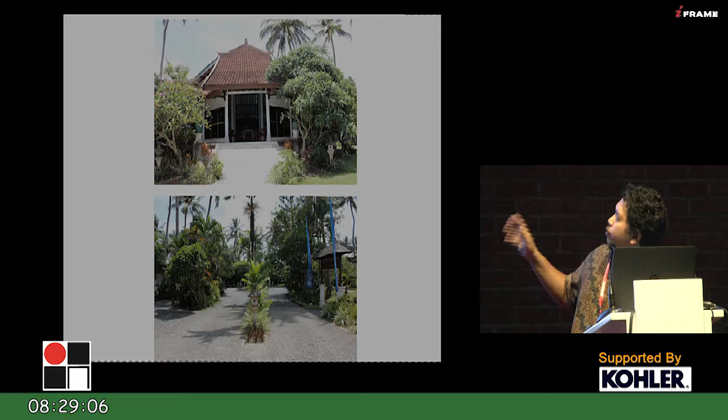The chapel was the small thing, and then the restaurant - the resort asked us, okay, you're doing good with the chapel, let's renovate our restaurant. It's bigger. This is the old restaurant, a really old building, built in 1980 something.

And this is the entrance of the resort. It's nothing catchy, so we need to have something that gives identity to this resort. This is the plan. They were categorized with a C rating because of their bad reputation - not reputation, but bad service.

Why? Because that's the center area that I put the hatch. Actually, that's for the rest of the employees - that's the kitchen, that's the employee rooms. So when there are no guests, they sit around in the middle, while guests come to the lobby and then go down the small alley going to the restaurant.

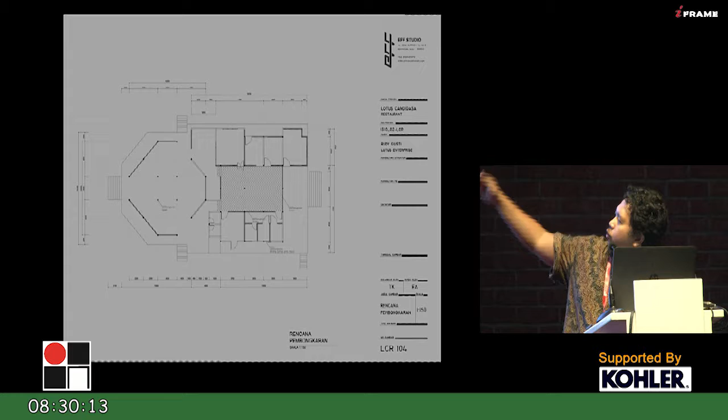So how did this happen for that long a time? We need to design, we need to compromise. And I said to them, okay guys, when you work there, when you're off, you go to your rooms - these are the other rooms. So we divided the plan with that, so when people come, they directly see the restaurant and see the view.

Our client was trying to keep the existing building as much as possible. So we said, okay, we'll just take out the roof. And then what kind of ideas? Their logo is manta ray, so we thought, okay, how about we make something like this?

It fits - that's the cardboard model of the existing wall they have. We just put the manta ray shape on it. On top, that's a 15 meter span octagon. And we put a little bit of squid tails in the back for the kitchen and staff rooms.

This is kind of the sections, the details. But that's how it will look - like a manta ray, octopus, squid - something like that.

Yeah, this is me - can you guess this? What is that? This is not archery. This is the model of the truss of that manta ray's ribs. So we did a little bit of parametric design, but then manually like that. Using that model, our workers worked with it to replicate the structure.

And this is what happened with the structures. We put bamboo weaving as a ceiling, and we did this above the kitchen so the heat from the kitchen goes out, while also making creative ceilings instead of just flat ones.

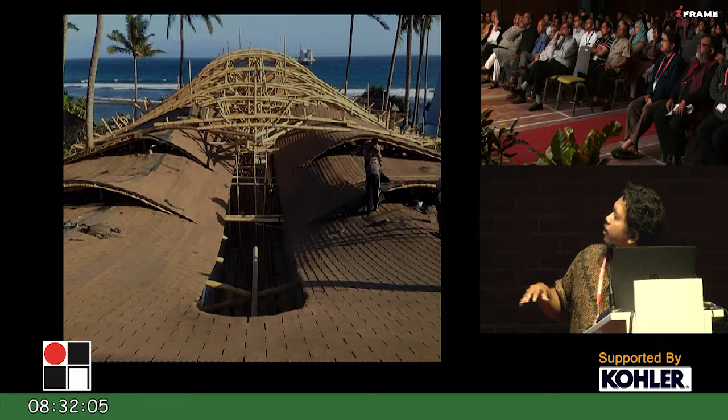And that's from the top - we put asphalt shingles on it. And I think we have a good proportion of the openings there, to bring light in and bring the hot air out.

And this is the entrance now. They got the feeling with the glass skylight. That's the interior that I think you guys used for the posters. That's from the inside.

So basically we kept the wall, but just put another roof on top, and it works. Sometimes you need to compromise with the concrete, sometimes you need to compromise with other things, but it should all fit together, so the end result of the design is really nice.

And this is another thing - just like with a partner, don't try to change them, just love the way they are. So we try to also just love the way bamboo is.

Okay, this is the model from the top, but actually this is a project in Jogja, in Java. There's a lady who has a flat piece of land, but close by there's a river and a cliff, about 14 meters deep. And you can guess what she decided for the design of the construction.

I want to have the house at the cliff. But you have the big flat land! No, I want to have the cliff.

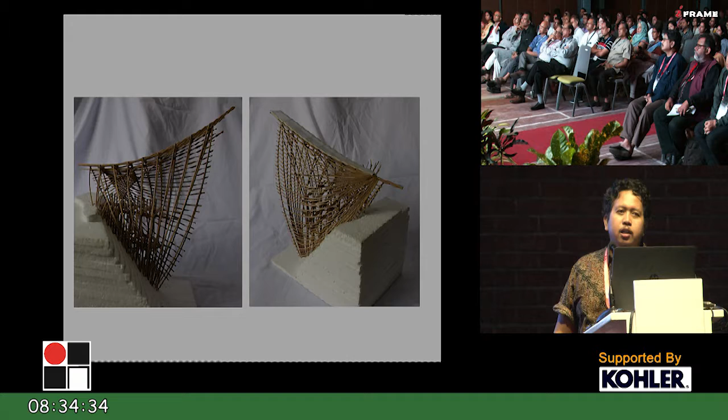We do the treatment on site and use it in the construction. So that's in the front, 17 meters long bamboo. We're not cutting it, so it's really pure, like 17 meters, and then it's going smaller.

The idea is like this: from the flat land, the owner will come to the second floor, going to first floor, going to the ground, and going to the river. That's the idea. We have one in the middle that's the tallest one - third floor, second floor, first floor, and then going to the river.

And this is how the complicated foundations work. We try to not change the contour of the land, so we are following the land. The foundations, the tie beam, is following the land - it's like grabbing the contour, kind of like a spider web thing.

After this, the bamboo sits on it. My engineer said that by doing this, we're not ruining any existing contour that has been there for a couple years, like maybe 40 years or something.

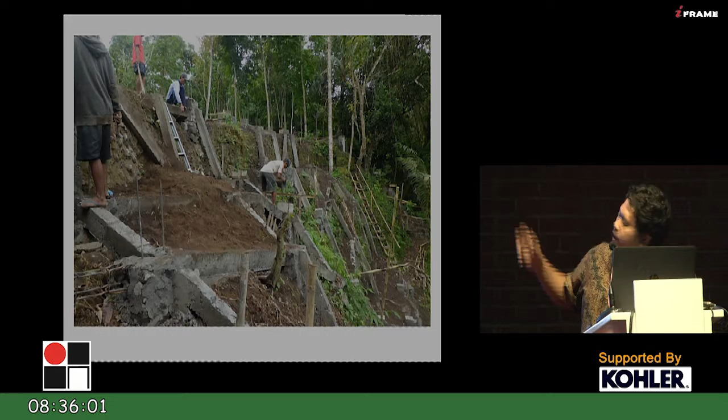Basically, if we cut the hill and don't use a retaining wall, there will be a landslide. But we don't want a retaining wall because that would be expensive, 14 meters, and not look organic. So we use that, and then we put the bamboo on top of the tie beams there.

This is another replication of the bamboo columns there - 14 meters, 17 meters, going to 14, going to 10, going to others. This is from the top. When people arrive there, it's only one story, but then when you go down, it goes down until to the ground.

The structures went through half the construction, and we kept the trees around it, so it becomes like really in the middle of a forest, sitting perfectly there. And this is when it's done.

The idea is we use the same bamboo roof with really steep angles, so the water runs directly down. We put a little bit of skylights there, so every floor gets the light coming in. It's perfect, and everybody likes that, and it fits with the site.

Another thing is, sometimes in a relationship you have complications but you try to work it out, right? So this also happened with our projects with the bamboo - it's complicated from the clients for sure. They want to make something like this.

It's not like what Andre have, which is more parametric things - they just give me 3D, also like 3D you can do anything. But then with the bamboo, it's another thing, so sometimes the architect just says, Evan, please make it work.

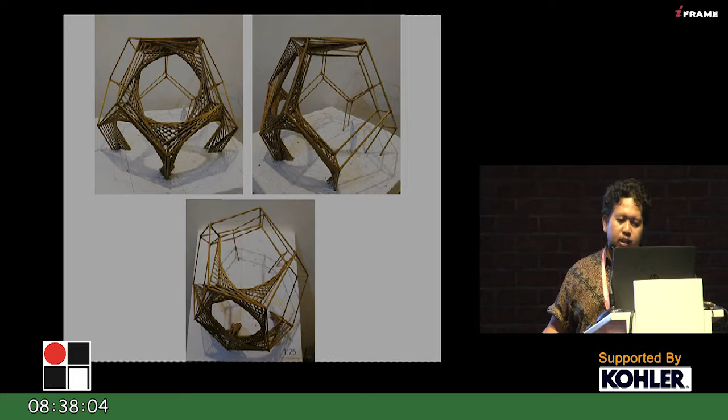I really need to learn about Grasshopper, the Rhinoceros things, but sadly, yeah, we still do it manually. We make the models like that, to see actually how it twisted.

The challenge is to explain those Rhinoceros models to labor who never knew about parametric design, but then, step by step, I'm there every single day to make sure they understand how the twisting bamboo things work.

It took 1.5 months to construct this. And even the clients wanted to have an extra extension out, so it's not just perfectly round, but with an extension out - even more complicated, but then it's done.

This is almost done. So this is actually for the Westin Resort in Ubud. The resort is okay, but because of this structure, people like to come just for a selfie with it in the lobby. Sometimes we're not doing the great things in the projects, but then we try to make something standing out. Their design is really typical standard hotels in Bali, but when they have this in the lobby, it makes the image of the resort different.

So we love to make something like that. And this is parametric, so we can update it too with this kind of design. The good thing about relationships is we try not to be egoistic, only benefiting you and your partners, but we try to bring benefits to others.

So that's what we've done, as Bamboo Notion said in the beginning. Bamboo Notion is about a learning process. We invite a learning process with students, with people, with architects, with carpenters, as Andre has, but I'm not that much like Andre. We have one example from 2014 with Sydney University and my alma mater in Yogyakarta. It's 3 weeks: 1 week in Bali and 2 weeks in Jogja. We try to build something to help people understand bamboo, try to love bamboo.

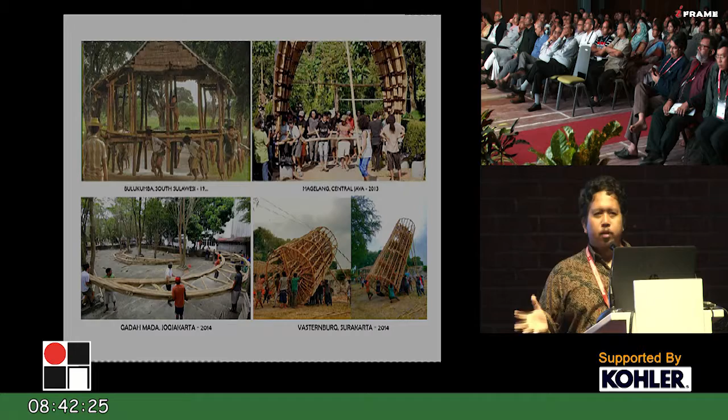The next steps, we actually try to build something - like we have a case here. I don't know if you have that kind of case, but in Indonesia, kids who want to go to school need to be like circus players, crossing cables and such. That's dangerous. But since I have experience designing and building something like this, why not?

We have a workshop that's almost like a bridge too. So in the future, we want to make a workshop like this. We even try to open design competitions for bamboo bridges, so it can be applicable anywhere around the world. That's our dream next.

That's the thing, and I just want to show you the video.

Gone. This one? Okay, okay, maybe lower the volume. It's not needed.

Okay, that's the workshop for the artists, so you can see how we're working on it. We make templates on the ground, making the curve, using only small bamboo, no big machines, all by hand. Even in this funny way they make holes, but they're students as well.

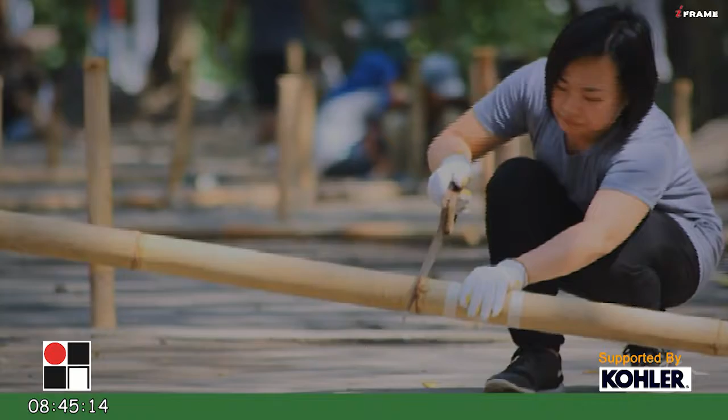Try to make the bamboo nails, pipes. That's how we join the bamboo to become that length. And that's how they bend the bamboo.

Yeah, that's their own design. They build it themselves. The shelter still exists until now.